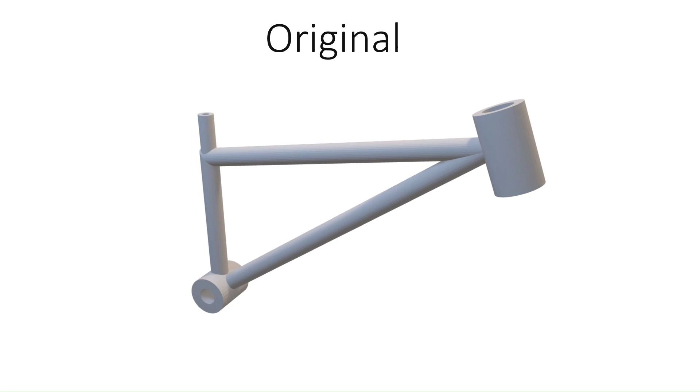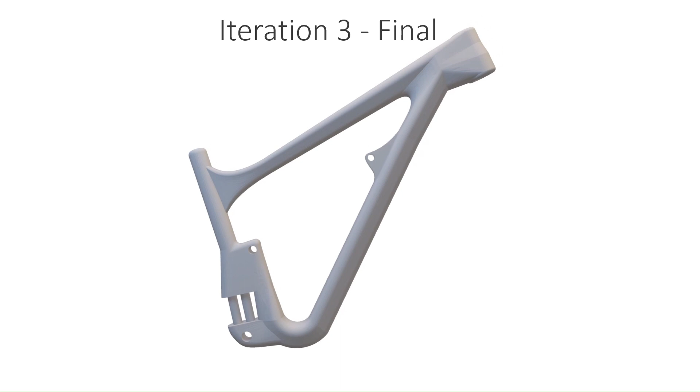Starting with the mainframe, we began with a very simplistic design that did not perform well under FEA simulations. The second iteration was much more complex. The third iteration included a slight geometry change to this joint, as well as a 30-pound decrease in weight. Here are the three next to each other. Note that the material is 1023 carbon steel. In the third iteration, there's 5mm thick walls, which is realistic to real-world applications.

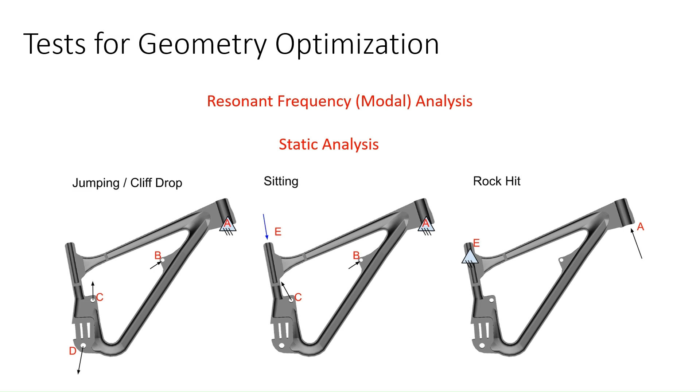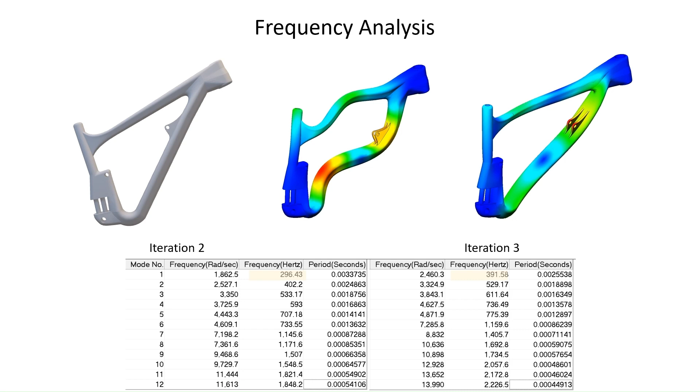The tests for geometry optimization that we completed were resonant frequency analyses, as well as static analyses for jumping, sitting, and a rock hit simulation. In the frequency analysis, the geometry changes to the frame increased the minimum resonant frequency up to about 400 Hz. This is concerningly low for real-world application because mountain bikes experience frequencies as high as 600 Hz. That being said, the suspension on a mountain bike is a complicated damping system that was not accounted for in this analysis.

The first static test was the jumping/cliff drop test. The free body diagram on the right shows a fixture at the fork connection and a 1,000 Newton load that is appropriately distributed to points B, C, and D by the rear suspension. The table at the top holds the results for the three iterations undergoing this test. Note that despite a 50% decrease in weight from 60 to 30 pounds, in the second to third iteration, respectively, the max stress barely increased relative to the yield stress of 282 megapascals.

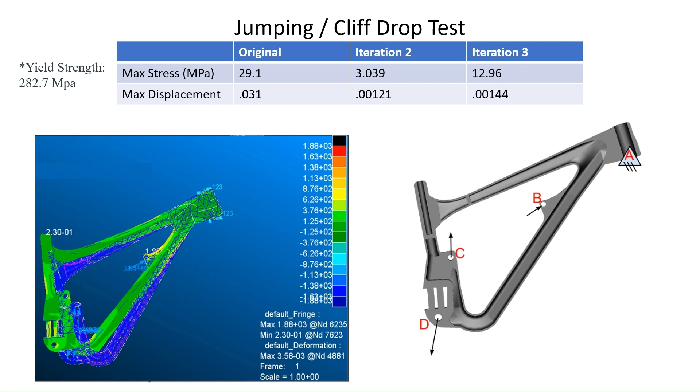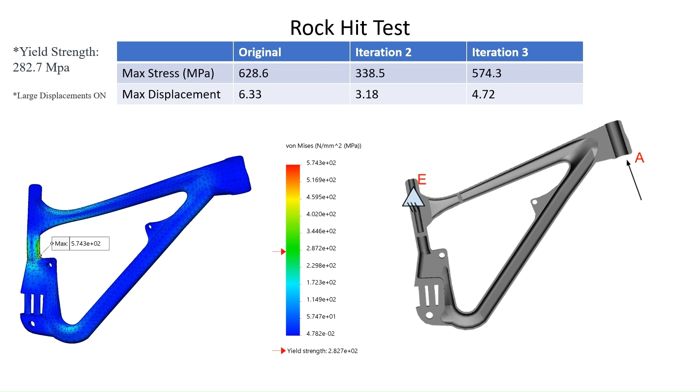Finally, is the rock hit test. It's to simulate a 200-pound biker hitting a large rock with the front wheel at 30 miles an hour. Force A is about 5,000 newtons. This test had similar results to the jumping test with an increased maximum stress in the last iteration. Under the given boundary conditions, the part does yield in all versions, but it is worth noting that thanks to the front suspension, most of the force would realistically be dissipated. In this test, a nonlinear large displacements option was turned on for more accurate calculation.

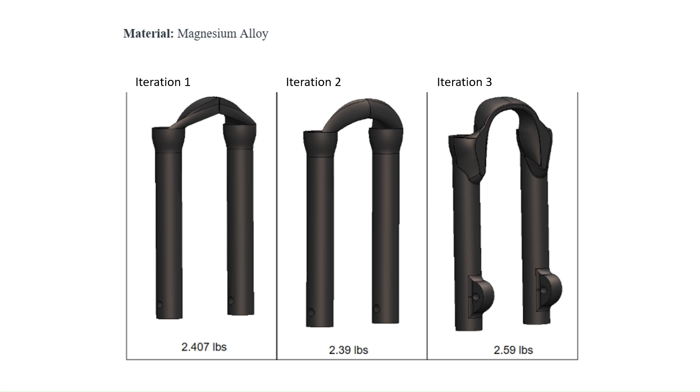Next, we'll move on to the fork arch. As shown, this is our original design. With our next iteration, we smoothed out some sharp edges from the original design, and finally, with our last iteration, changes to the arch included reinforcements as well as separate and rigid axle to wheel connections. Here's a brief summary of the design stage process for the fork arch. Note that our material of choice was magnesium alloy, for this material is primarily used throughout the industry.

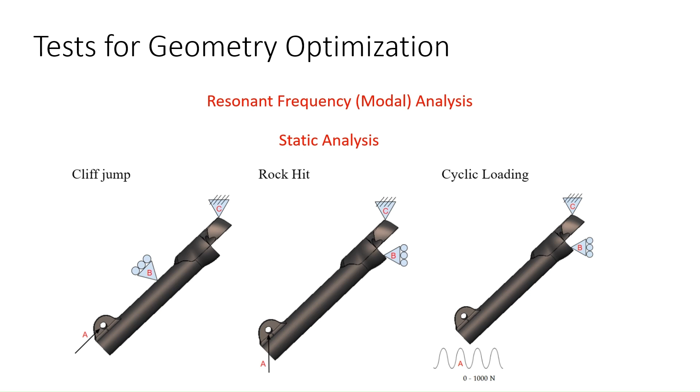The tests run for geometry optimization included frequency modal analysis, static and cyclic loading simulations for a jump, and finally a rock hit static analysis. Modal analysis was conducted on the fork. With each iteration, the lowest resonant frequency increased as planned. Note there are no boundary conditions in the study, and thus only modes 7 through 12 were considered.

First, we'll talk about the cliff jump test, which was used to simulate a biker jumping off a cliff and landing directly on the fork, where 1,000 newtons was applied parallel to the fork arch. With the applied restraints shown in points B and C, the part did not fail in the final iterative design, as shown in the table.

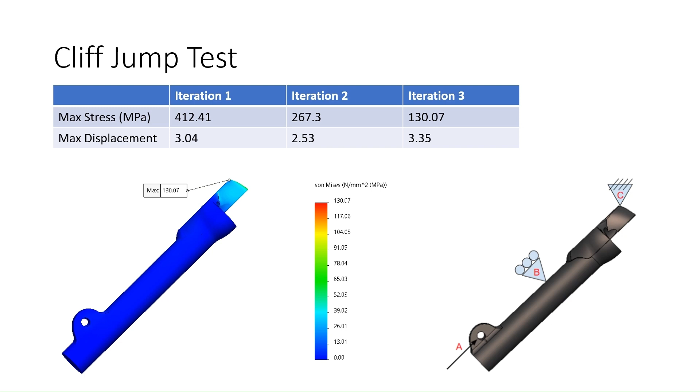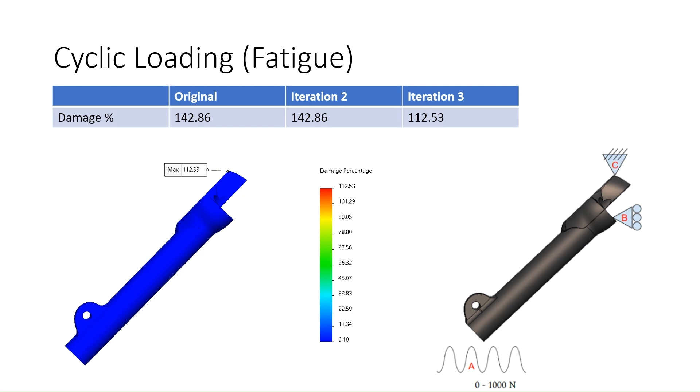Finally, a cyclic loading analysis was used to simulate repetitive racing conditions of a biker. As seen from the point on the S-N curve, with the applied loads and restraints shown in the previous slide, the fork arch did fail due to fatigue. With that being said, with this fork design, an avid biker can still safely jump a cliff about 10 times a day for around 2.7 years before failure starts to occur.

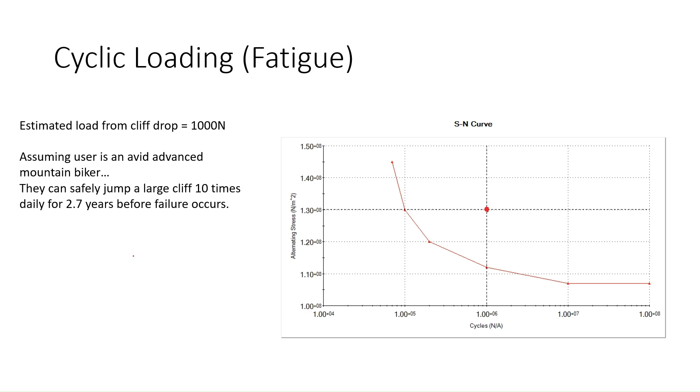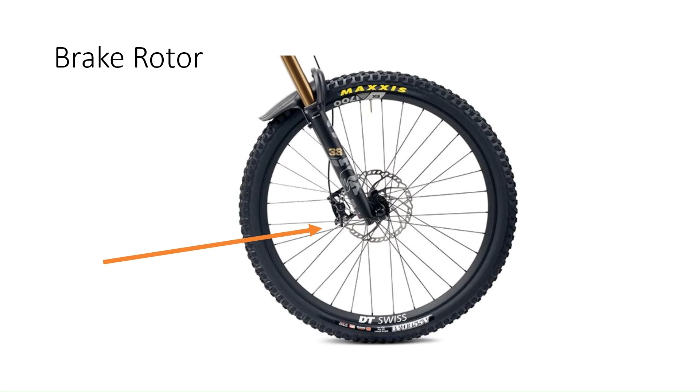Finally, we move on to the brake rotor. The first design of the brake rotor was a simple disc weighing about 2 pounds. The second design, we dropped some weight down to 0.8 pounds, and the third design, we increased in complexity and performance to about 1 pound.

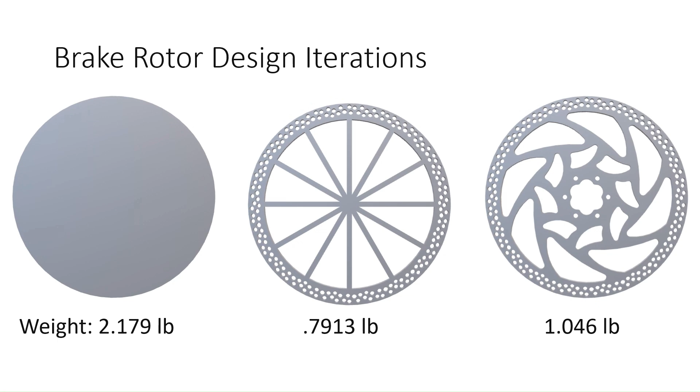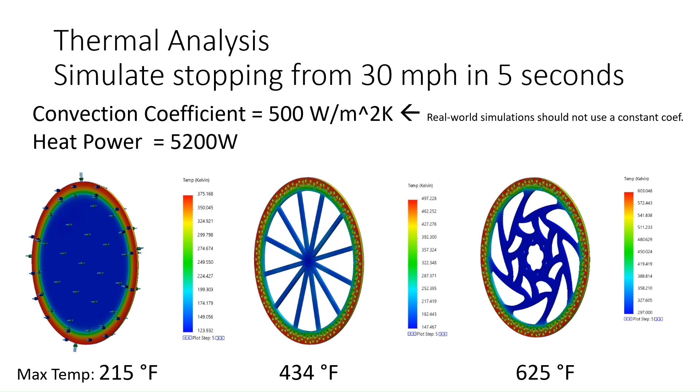The first test that we did was a thermal analysis to simulate stopping from 30 miles an hour in 5 seconds. The heat power from the stop is 5,200 watts applied to the outer ring, and the convection coefficient of the wind moving past the brake rotor we decided was 500 watts per meter squared Kelvin. Note that the max temperature from these tests increased as iterations followed from 434 to 625 degrees Fahrenheit. Note that the real-world simulation should not use a constant coefficient of convection.

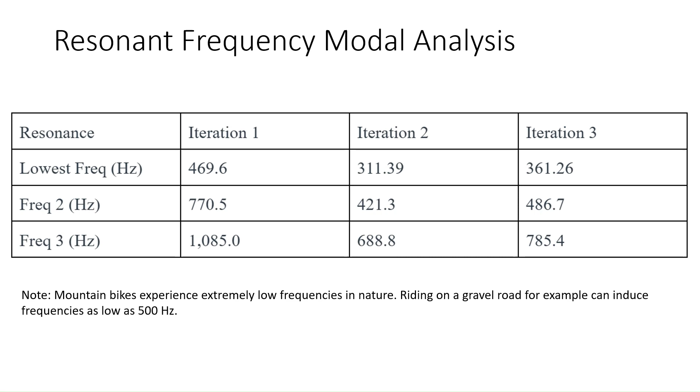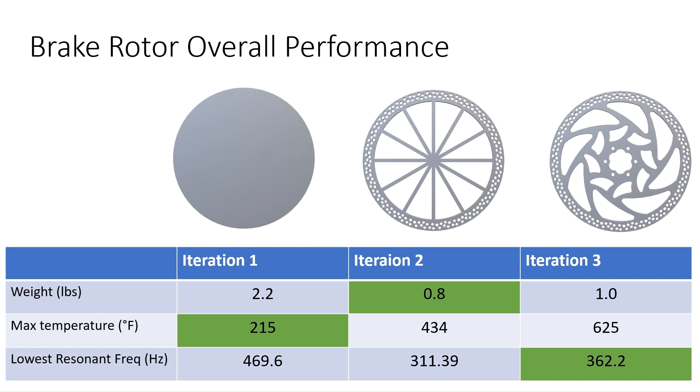The resonant frequency modal analysis yielded that iteration 3 performed better than iteration 2, but not as well as iteration 1. These results do not conclude a superior design. Finally, for the brake rotor overall performance, the best in weight was iteration 2, the best in max temperature was iteration 1, and the lowest resonant frequency was best in iteration 3.